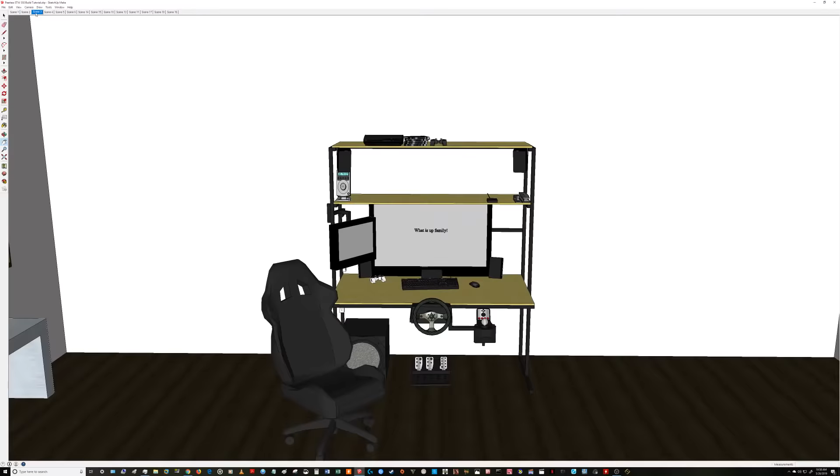Right now we're back in the lab, and a box build is on the menu. So what is this all about?

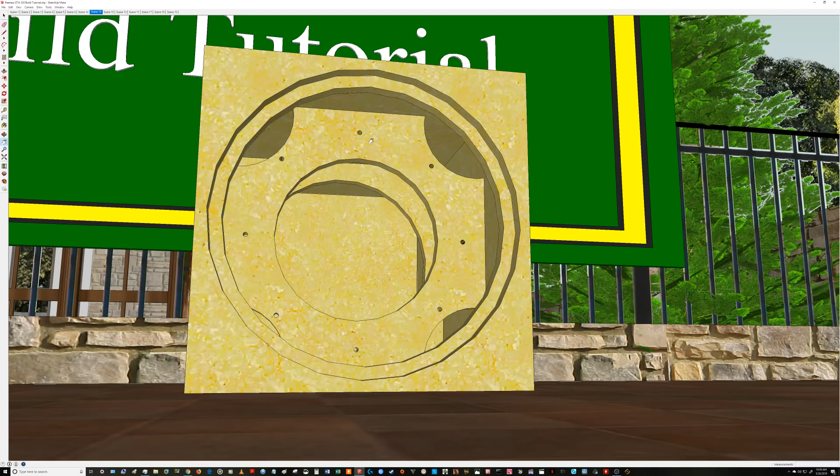In addition to this inner ring right here for rear mounting or rear bracing for the subwoofer, I have an additional piece right here for bracing for the center of the box itself. So this is pretty much what she's going to be looking like. This is what she's going to be housed in. And these are the cutout parameters that I used to construct the box itself. This box was actually cut from one piece of 8x4 MDF wood.

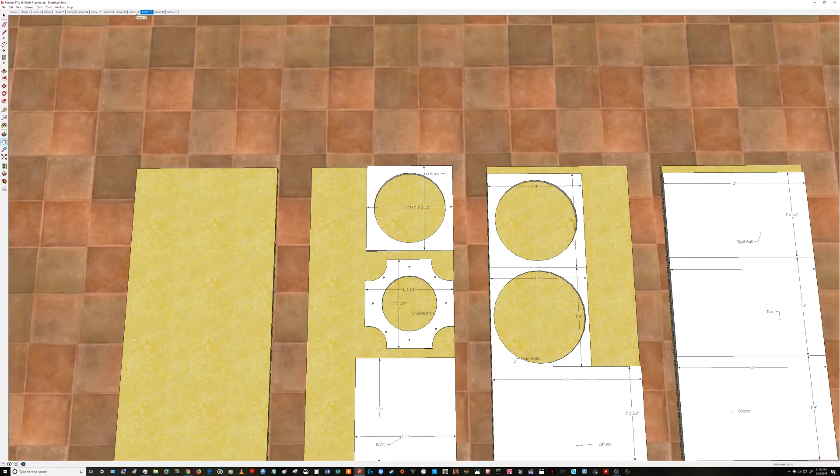But enough of that. Before we can even get to that point, there are a few things that we're going to have to point out about this build. Of course, you're going to need your overall outside diameter. This is what we're looking at right here. And over here on this side of the screen, you're actually going to have many parameters that you're going to have to take into account whenever building a subwoofer enclosure.

Now, Peerless have gone and had all these made available to us. Most subwoofer manufacturers do give you some type of parameters and cut sheet and specifications for their drivers. Peerless was one of those who went the extra mile and actually gave you some pretty good stuff as far as documentation. Right now we're over here at Parts Express, and as you guys can see, when you go here and look at this subwoofer, before you even purchase it, they have the documentation available for you right here.

All manuals and resources, these are clickable and downloadable. What I would suggest for you guys to do is open them in a new tab and get kind of familiar with them. Right here is the warranty. Of course, we won't be needing that unless you actually purchase it.

Then you have the driver specification sheet. This is very, very important because it does have some mechanical drawing right here, and it does give you some specs down here, a few TS parameters. You've got your frequency response. This is pretty good if you are looking just for an overview or a summary of what the driver is all about.

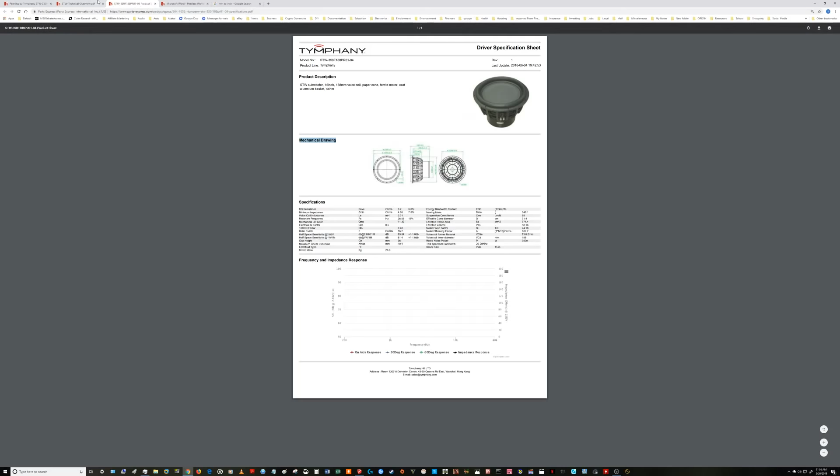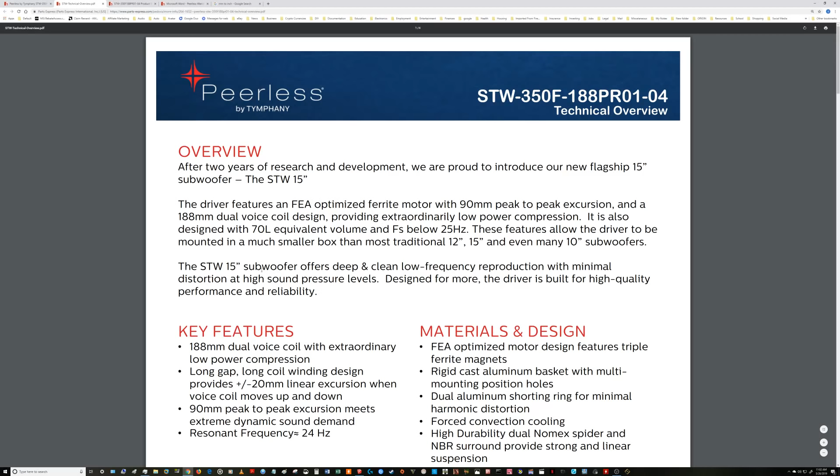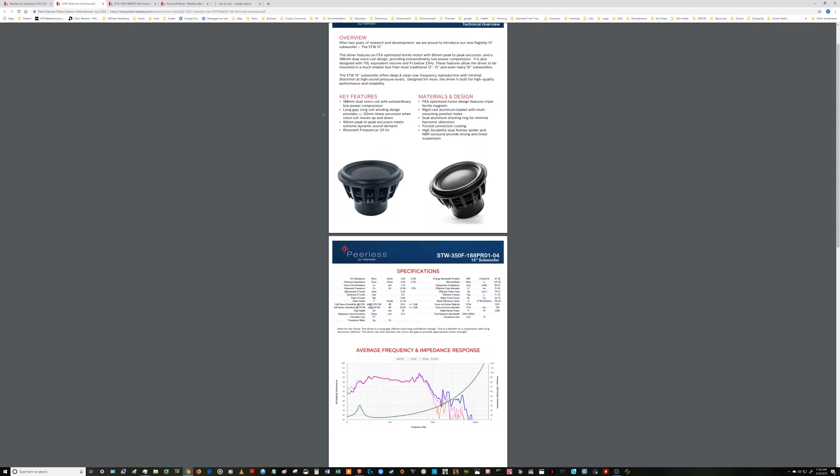But it is this sheet right here that I pretty much use myself. This is going to be the technical overview. This is the one I spent the most time with, because it gave more than just a summarized view or introduction of the driver. It gives a more specified overview, not an under-view or a summary. It gives an overview of the driver itself.

And as you guys can see, all this stuff we will take into account in another video when I actually go in and tune the enclosure. But since right now all I'm doing is a sealed enclosure, it's kind of easy because all I want to do right now is stick to the specification that the manufacturer had for it. Roughly 2 cubic feet is what they are recommending for a sealed enclosure, and sealed enclosures are very, very easy to do. All you have to do is make sure that the box is tightly sealed with no air leakage, and you're pretty much good to go.

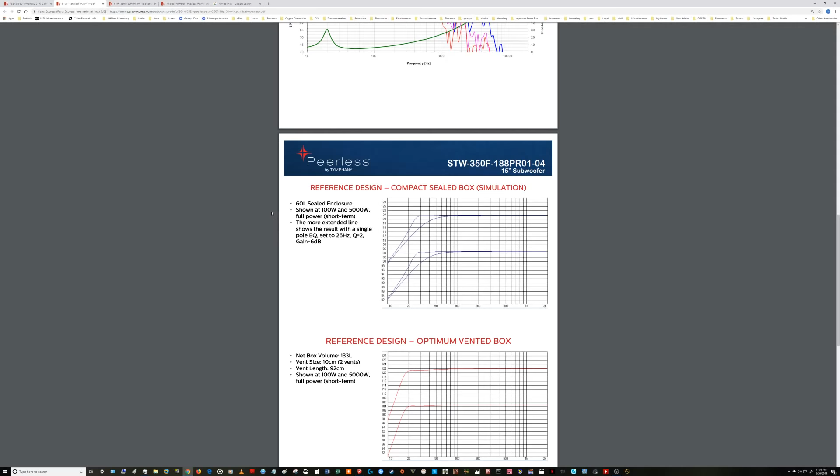It's the easiest type of enclosure to build. But when you're talking ported and band pass and things of that nature, then things can get a little bit more complicated. But for right now, we're going with sealed, and we're going to be using information off of this sheet right here in order to do that enclosure.

So this is what I want you guys to focus on the most. And for some of you guys who are not used to using millimeters in your measurements, don't be intimidated by that. Google—there are many calculators that you can Google. I mean, Google has one right here in the forefront.

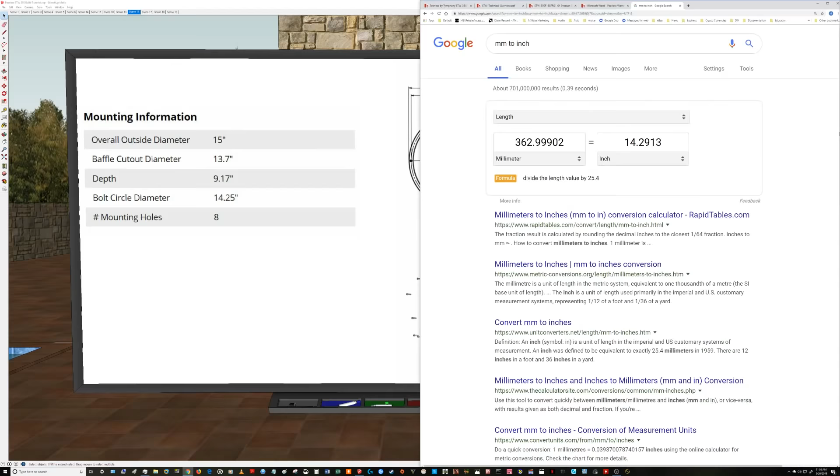All you have to do is search millimeter to inch on Google, and this little calculator will pop up. It's very convenient, and this is what we're going to be using to get some of those specifications we want over here in SketchUp.

We're going to be looking at some parameters that are in millimeters and converting them to inches. If you don't know how to do that in SketchUp, I'll show you exactly how. Right now this SketchUp environment is fine, but I want to show you how I personally build a box from scratch, meaning how I went from what you've seen earlier to this right here.

How do you go from a spec sheet to actually having something up to spec, getting this design on the floor with all your cutouts and precise measurements? In order to show you how I do that, I'm going to have to start anew.

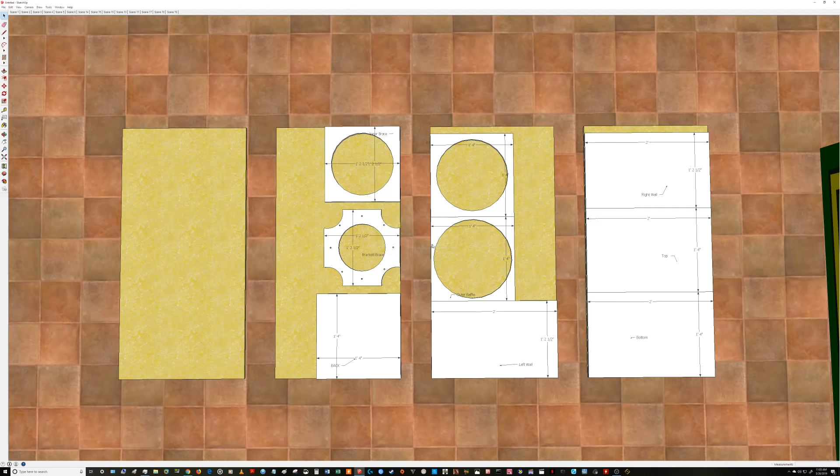So we're going to go to the file menu and click new, and I'm not going to save this since I didn't make any changes worth saving. Here you are - this is what a brand new SketchUp environment built from scratch looks like. I chose the SketchUp environment based upon inches and feet.

You can build an environment here in SketchUp based upon millimeters if you wanted to, but being that I'm used to inches - all my conversions and all the tools I use in my shop are in inches - that's what we're going to be using today.

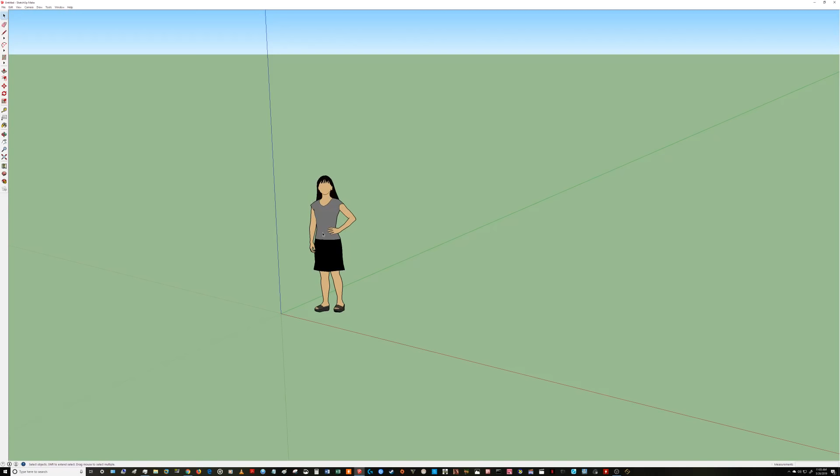My lovely assistant here isn't actually needed for what we're trying to do right now, so she has to go. Just know that anytime you start in SketchUp, you're going to start at the place of origin.

That's what these different axes represent - well, actually, these different axes actually represent those axes. But right now what we're focusing on is this center piece where they all connect, or where they all intersect. That's going to be your place of origin.

For right now, we want to focus on a piece of one of those diagrams I showed you earlier. If we go back to Parts Express and look at one of these cutouts, the one I'm looking for specifically is the one that shows the outer parameter. We need to find out exactly what this is right here.

The outer diameter, or the circumference of the subwoofer itself, is going to be very important to the next step we have to take in designing our enclosure. As you can see, this is 381 millimeters. We're going to go to our converter and put in 381 millimeters, and as you can see, that's 15 inches.

I'm going to show you right now why that's very important. If you go back here to all these drawings, the one I'm most interested in right now is the one in the center. This one is what I'm focused upon, because not only does it give me the outer diameter, it also gives me these other specs right here to play around with.

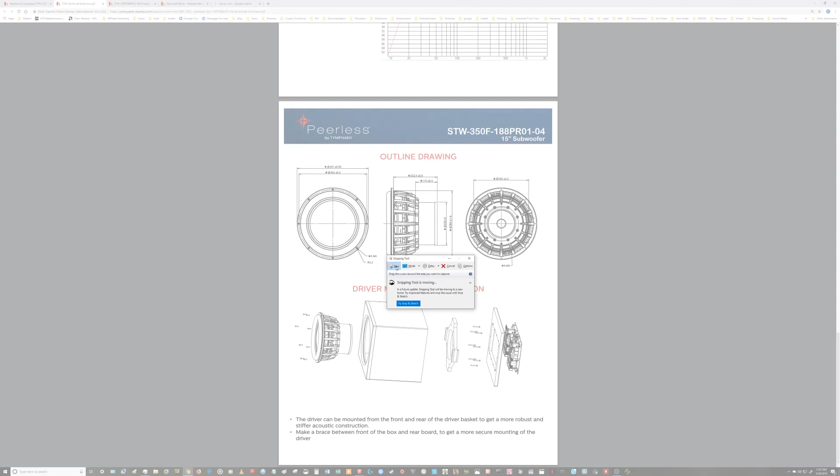So what I'm going to do is make a copy of this. If you don't know how to do that, Windows has a little tool called the Snipping Tool. You just hit new, and by default it allows you to do this, and you can actually save it - save it right here, and build upon this image with these little parameters already applied. I've already taken the liberty to do that, so I'm not going to save it again.

Right now we're going to go back over to SketchUp, go to the file menu, and hit import. So what are we importing? We're going to import that exact image we talked about earlier - remember, I told you I had already saved it.

So we're going to be importing this little image right here, and we're going to actually use it as an image, not as a texture. A texture and an image is different.

An image is just that, it's an image. A texture is something that you apply to objects that you create within SketchUp. Because when you first create any object within SketchUp, it's just a plain white object, regardless if it's a circle, a square, a sphere, a cube, or whatever. It's going to have a plain white finish to it.

And if you want to add texture like wood or grass or stone, you would have to add a texture to it, and it will cover that entire object. In this instance, we don't want to use a texture. We want to import this as an image, and I'll show you why in just a second.

So we're going to select this guy right here, and select open. Now what we're going to be doing right now, you don't have to do anything. You move your mouse around, and this is attached to your mouse. What you want to do is go here, hover next to origin, and SketchUp has a snap feature or snap function that automatically snaps when you get close to certain edges, angles, centers, things of that nature.

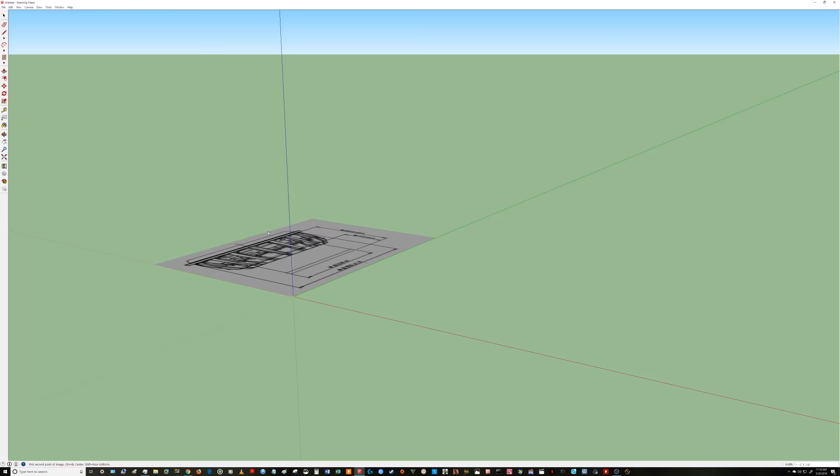You're going to find all that stuff out once you start to use SketchUp more consistently. But for right now, it's snapping itself to the green axis, to the red axis. You see the mouse is going slightly past it, and it's still connected to it. That's the snap feature. We're going to snap it to origin. Once you click, it gives you the ability to drag it wherever you want it. You see that? You can go in this environment, that environment, whatever axis you want.

This is green and red. This is green and red. I guess they will all be green and red. Anything but blue. You can't do the blue because the blue, of course, is your north-south pole. But anyway, what we're going to be doing—I shouldn't say north-south pole, it's actually your y-axis. And the green and red would constitute for an x-axis in this case. I don't know if this is a z-axis or not. My geometry isn't that perfect.

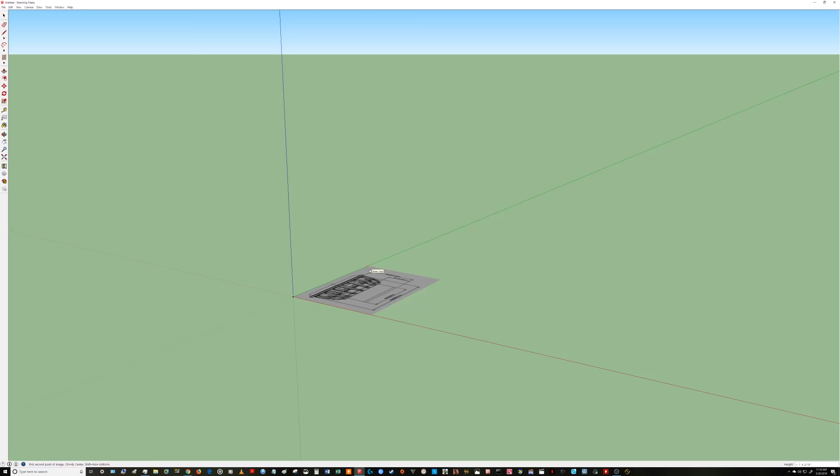But anyway, we're going to snap this to the red and green axis on this side of the environment. And we're just going to click it again. And now it's there. So why did I say that was so important?

Okay, so if we were to use our tape measure right now, which all you have to do is a shortcut—you can either come over here, and for most people, when you first start your SketchUp environment, this menu may be running along the top edge of your SketchUp environment. I snap mine to the left because that's what I'm accustomed to. But if you want to measure and see what the actual size of this is, you're going to get your tape measure. Start from one—it doesn't matter what edge you go from. Click and drag. You see this? Snap it here, and it tells you that's 1 foot 3 7/8 inches.

Okay, so that's roughly 15 inches. 15 7/8 inches is what you got. 15 7/8 of an inch. All right, so that's way too big. That's not what we're looking for.

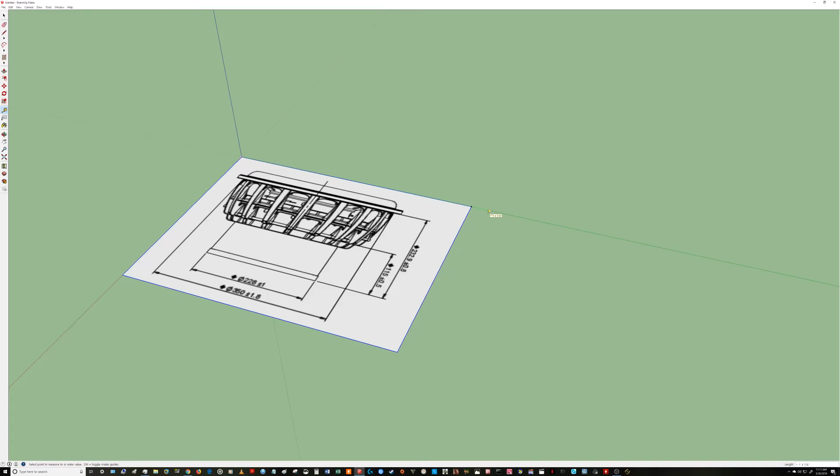We know that we pulled this drawing directly from the manufacturer. We know that these parameters, as they seem fit, are correct. We do know that this is up to scale. In this environment right now, it is not up to scale, but the way that it was constructed on this piece of paper here, it is up to scale.

So what we need to do—and to release this, just hit the escape button and it lets it go—is to remeasure this and reshape our environment to these specs, to what's on the paper. Now we do know that this outer diameter, or the circumference of the driver itself, is 15 inches.

Okay, we know that. So what we're going to be doing here is get as close to this edge as we can, which is about here. Click, get a handle on it, to here. You see how it snaps to the green automatically? I love the snap features in SketchUp. It's almost like you can't go wrong—there's no way you can't do a straight line. But anyway, go to the other edge here, and as you guys can see, that thing says 11 inches, 11 3/16 of an inch. That's too small.

This needs to be 15. You're going to click, right, as if you've just measured that. As you can see in the lower right-hand corner, it gives you that measurement. This box is waiting for your input. Everything right now is in inches, so all you have to do is specify the size you want that last measurement to be. Just type 15. You don't have to click in that box, just type 15 and don't do anything else.

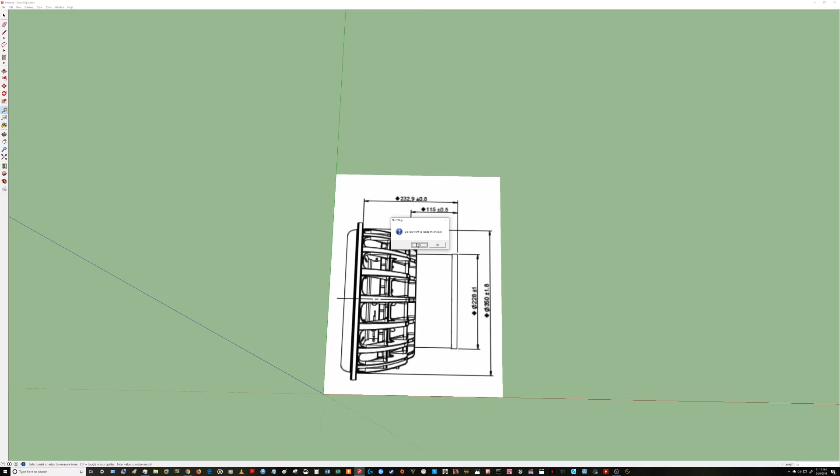Once you measure and it shows you what it is, you tell it what you want it to be and hit enter. This dialog box pops up and asks if you want to resize the model. I'm going to say yes, because I want the whole model to be based on the measurements of this diagram I pulled from the manufacturer. The manufacturer built this to spec, and that's what we're going to build our box around. So we hit yes, and it resizes. Now from here to here should be about 15 inches, and that's what you got, 15 inches.

So why is this very important? We know we're looking for a 2 cubic foot enclosure, because that's what the manufacturer recommended, and that's what we want to shoot for. In most cases, that's what you guys would want to shoot for. But in my case it's a little different, because the 2 cubic feet gives you an F3 of 43 hertz.

I want mine to be tuned a little lower than that. So instead of a 2 cubic foot enclosure, I want to get this thing as big as I can - well, I shouldn't say as big as I can. I want to give it at least 3.5 cubic feet, and I'll tell you why. I ultimately want it to be around 3 cubic foot, but I'm saying 3.5 cubic feet to account for the displacement of this massive motor, and also bracing on the inside. So if I make this 3.5 cubic feet, that accounts for the 0.3 cubic feet this thing already takes up in displacement, and the 0.2 cubic feet of bracing I'm adding later. That gives me roughly a 3 cubic foot driver with an F3 of around 33 hertz. That's what I'm looking for.

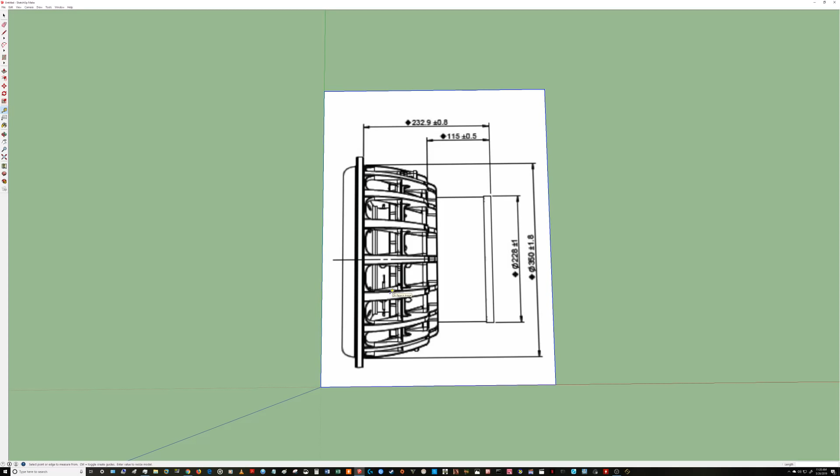In my mind I already know what I'm going to be making and how long. It's going to be 2 feet long, and 16 inches in width and height, and 24 inches long. I've done the measurements, that's what I'm going for. This thing is also going to be double baffled, and rear mounted right here, so it has to have another rear mount brace on the inside of the box. We have to do all of that stuff. That's my mental plan. Now to move on with the actual measurements.

Okay, so right now what we have here is depth. We're going to have to deal with getting these things converted. That'll be the next step, to get these things converted. Let's get this converter back up. We're going to go to tools, and go to text. This is what you want. So right here you've got 232.9 millimeters. We need to find out what that is.

Like I said, there is a millimeter environment for all you guys who do things in millimeters that you can choose when you first start up SketchUp. Let me just open up a new SketchUp to show you guys exactly what I'm talking about. When you first open it up, if you go to template, you see this? I'm doing feet and inches, but you can do meters, you can do an architectural design. Let me scroll and let you guys see it. And there it is, millimeters. You can do this as well. So you can do a whole lot with SketchUp.

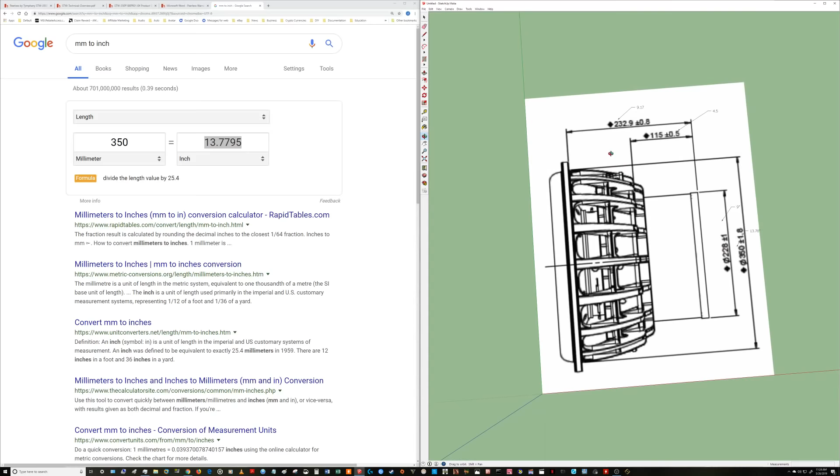All right, so where do we go from here? We have the driver. We know that we don't want to make this thing massive, right? So what we're going to do, in my case, I know I'm going to be using 3/4 inch MDF. So what I'm going to be doing is constructing my base from this right here. I'm not going to do the base yet—what I'm going to be doing is the face of it, and I'll show you how I do that.

Now, you guys can pick this—this is rectangle, but I'm so used to it, I just use the shortcuts. Select R. If you select R, it turns into the little rectangle symbol, as you guys can see here. I think if you hover over it, it may tell you. And they do more than that—they do circles and polygons as well. R and C are the shortcuts, okay?

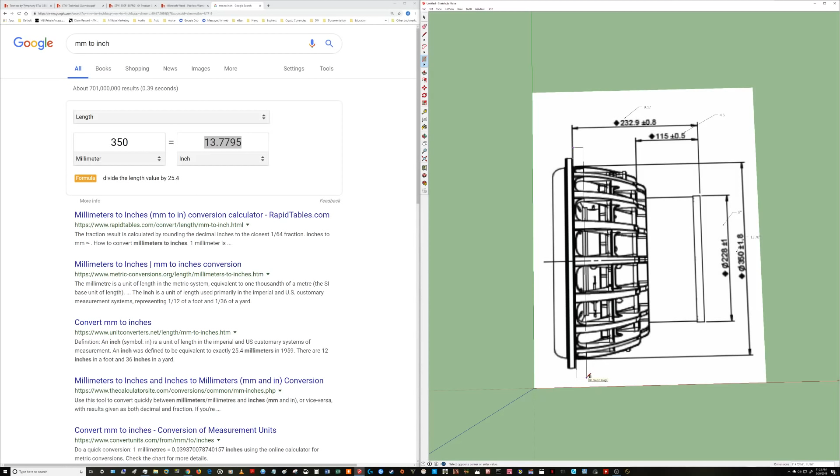So what we're going to be doing is, this is 15 inches, so we want the whole face to be about 16 inches, okay? So we're going to go half an inch out on the outer side of it. So this is going to be 16 inches overall. We want it to be 3/4 of an inch wide, because that's the MDF we're using, and 16 inches long. Okay, so there we go.

Now, this is not perfect. As you guys can see down here, this says 16 and 5/8 inch. We don't want that—it says 5/8 of an inch wide. This is your length and width in this instance. Depending on what axis you choose in the beginning, this can change. But for right now it says 16 and 5/8. We don't want that. What we want... and like I said, this thing is ready.

Every time you make a measurement or create a shape, this thing is waiting for your input. We want 16 inches, right? Separated with a comma. And we're going to say, you can do 0.75 of an inch, or you can do 3/4.

In this case, I'm going to do 0.75 of an inch to show you guys that it does work, okay? You can use your move tool, shortcut M. If you see this here got highlighted, it's crosshairs, and you can move this a little bit closer. A little bit closer. And as you guys can see, there's more room on this side of the driver than it is on this side of the driver. So what we're going to be doing about that is we're going to be adjusting this some.

So how do you get that perfect 1/2 inch on either side? I cheat a little bit. I use the line tool, which is the pencil, shortcut L, right? All right, I use the line tool, and what I do, I come here. That's not on the edge. I come here on the edge, and I go this, and I just say 0.5, which is 1/2 inch.

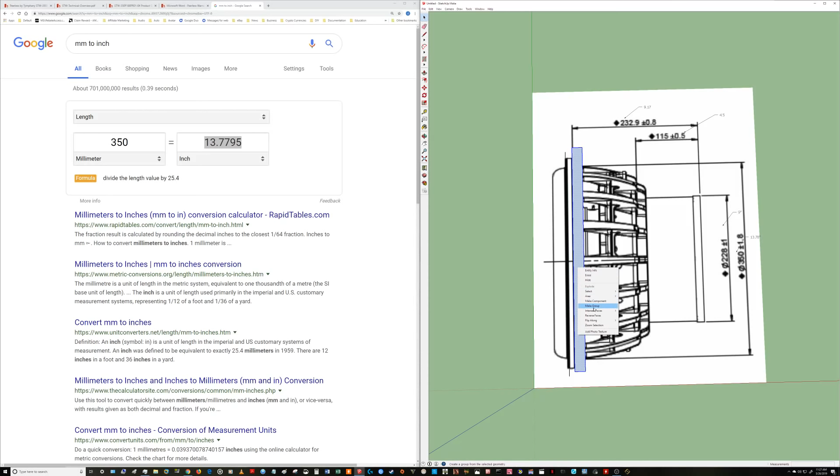Ooh, I forgot a very, very important piece of this. Whenever you're making plain shapes like this, like we made, you need to group this shape, okay? Double click it, it selects that whole piece. It did not select the picture. It selected this whole piece. And what you want to do is right click and say make group. And what it's going to do is group all of these individual pieces.

The way you have to know about SketchUp—if we just get another rectangle going, we're just going to make a small piece. The way that SketchUp works is that it does not look at this shape as being one shape until you tell it to look at it as being one shape. Right now, the way SketchUp sees this right here is that it has a center, it has a fill. Okay, it is filled here, which you can add textures, colors, whatever, and it has 4 individual edges. And that's how it would look at this shape right here. It's not really even an entity upon itself.

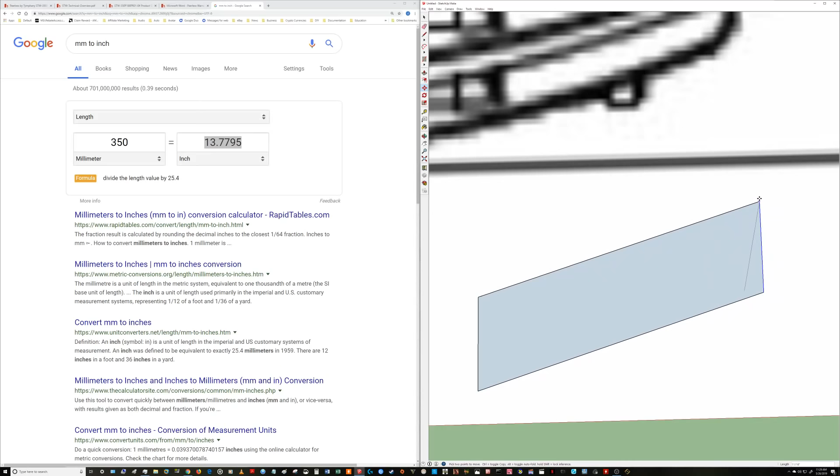It is consisted of 5 different entities. You have the center, which is the fill, and 4 individual edges. You can manipulate these edges. If you take this corner here and pull it, it will pull this thing in all types of directions, which in some cases is really good if you're trying to get a unique shape. But in this case, what we're trying to get is crisp, sharp edges. Okay, we're working with wood here.

All right, so what we're going to do, we're going to get rid of that. We already have grouped this guy, and once you group it, guess what it does? It moves as one piece. That's what you want, and it's actually snapping back to that place. That is so amazing. And that's just a picture, but it's snapping to the place where you originally made it from. That is so amazing. But anyway, enough of me doing that.

What you want to do here is line it up here. And as you guys can see, it automatically lined up here for you as well. So now it's perfectly lined up like you would want it, okay? Perfectly lined up for you.

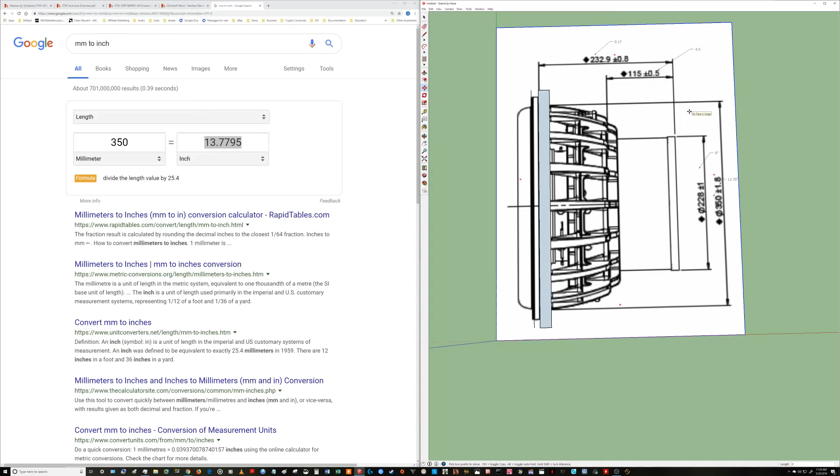All right, so what do we do next? Right now, that is just a 2D shape, right? It has no height. It has no anything. It's just a 2D flat shape. What you want to do is give that—you want this to be a 3-dimensional shape.

So what you want to do is use your push and pull tool, which is this little arrow with a box. You grab—okay, so before you do this, you know what? I'm going to ungroup this for you guys. I'm going to explode it. This is how you ungroup in SketchUp. As you guys can see, it goes back to being 4 individual corners and a fill. So what you want to do—because I got ahead of myself, it's been so long since I had to explain this to someone, I'm sorry.

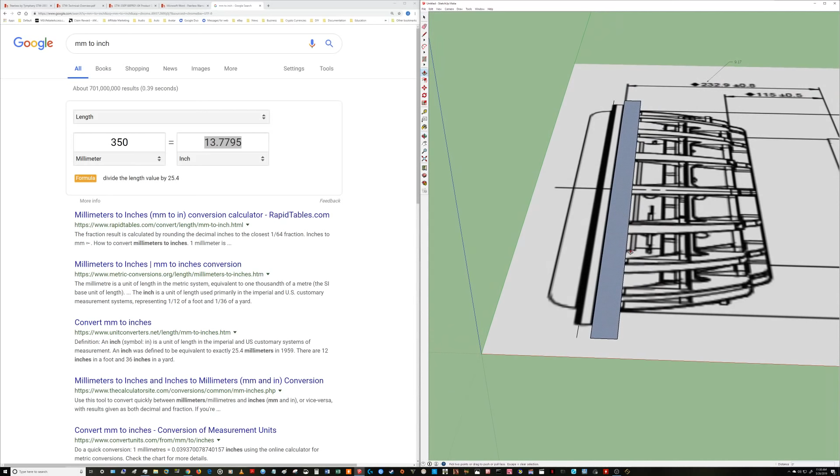But what you want to do is use your push and pull tool before you even group. And just pull this up. Now it's starting to look more like what you would be working with in a shop, okay? That's kind of what you would be working with in a shop, right?

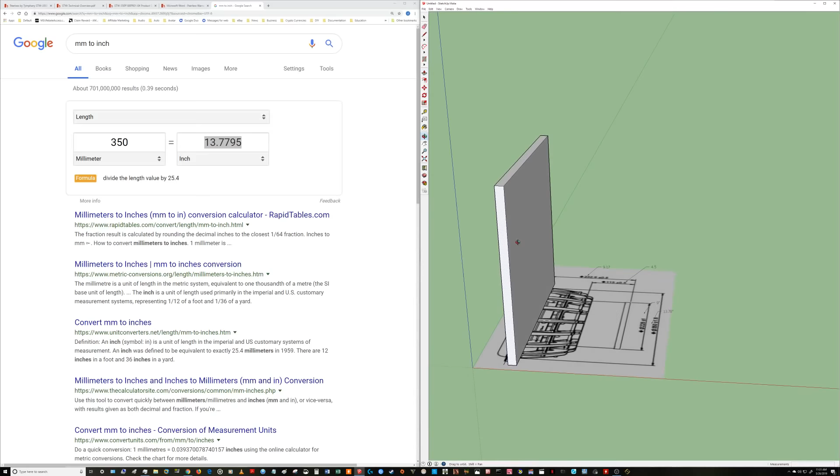So I'm going to undo and show you guys that one more time. You can pull this up. And how high did we say we wanted this? We wanted it 16 by 16 and 24 inches long. So, of course, we're going to type in 16. That's how tall it would be. Now the box is looking more like a box.

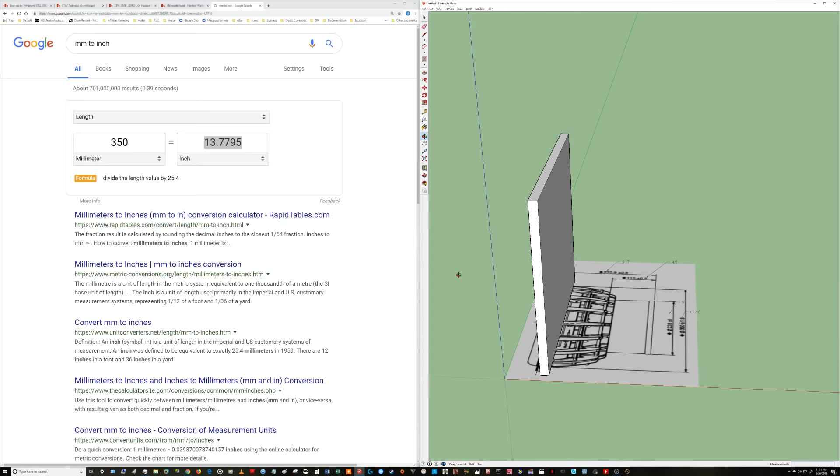And to make sure that our measurements are correct, we click T, the shortcut for tape, and we measure it. 16 inches, 16 inches, 3/4 of an inch. Just like the piece of wood you would cut. All right, moving on. Hit escape to release that.

Now, this is another cool feature right here. Oh yeah, don't forget to group this. If you hit the space bar, it gives you back your select tool. As you guys can see, this is not one group. These are still individual groups. Even more individual groups now, because the edge is also individual.

So what you want to do is double click this again. We'll actually triple click this. 1, 2, 3. It selects the whole thing. Remember the first time a double click would do because it was 2-dimensional. But now that it's 3-dimensional, you need 3 clicks. And what you want to do again, right click, make group. And there you go, you have the group.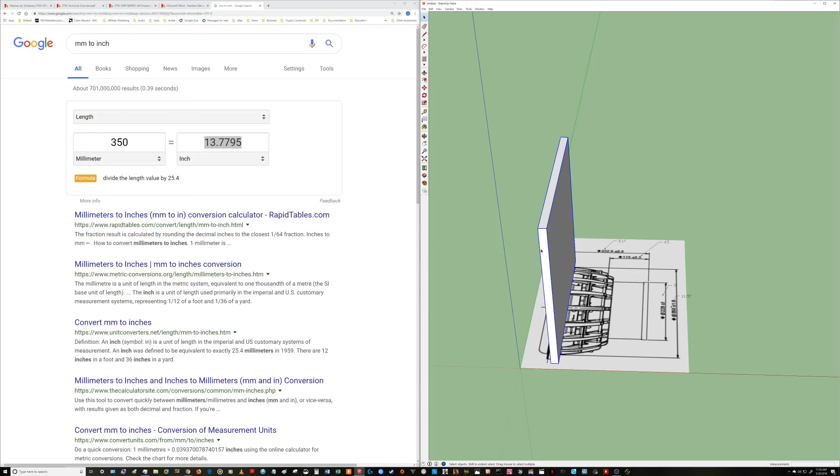All right, so another thing, we know that the front and the back are going to be the exact same, right? But I'm not going to jump ahead of myself. All right, so what do you want to do from here? What you want to do from here is you actually want to find your center, but we're going to get to that later. I'm not going to jump too far ahead. Let me get rid of that.

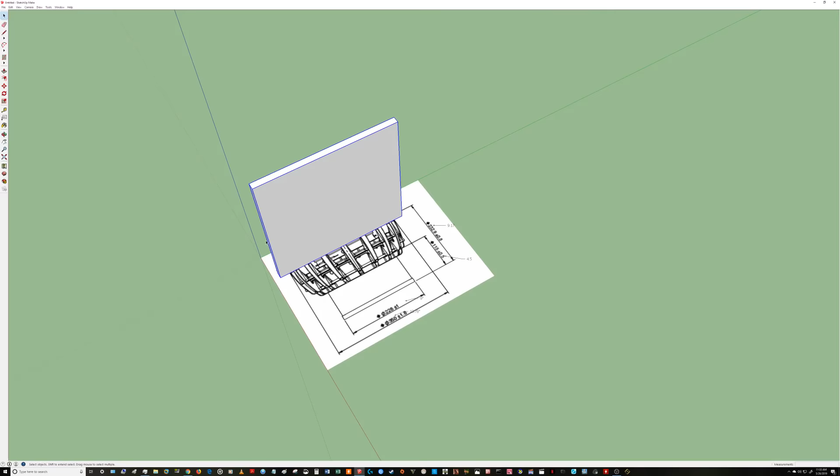All right, so what you want to do now is make your sides. You can make your sides. And don't forget this is going to be double baffle. You know what? Let's do the baffle first. That'll be fun. Let's do the baffle first.

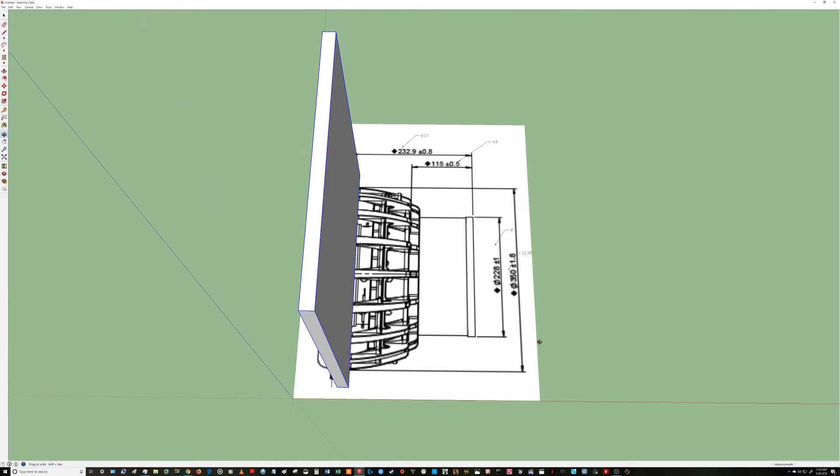As we can see, we know that the outer diameter of the woofer is going to be 15 inches. The inner diameter is what we want to talk about now. The inner diameter is actually this number right here, 3.78. 13.78 inches is going to be our inner diameter. This is where we're actually going to mount the woofer into that hole, and you're going to be able to drill your holes from there. And that's what we're going to be doing next, the inner baffle. Outer baffle, 15 inches. Inner baffle, 13.78 inches.

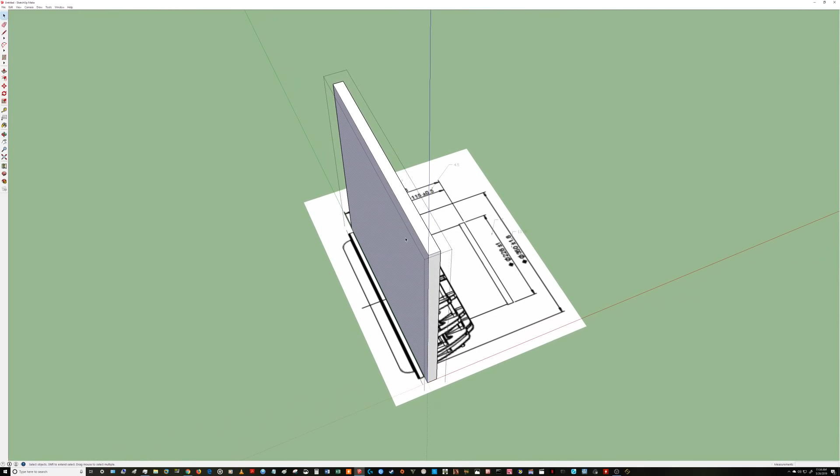So how do you do that? What you want to do now, since this thing is a group, it is one solid piece. You want to double click. Now you get on the inside. You open that group up, which is illustrated by the dotted lines here. It lets you know now you're on the inside of this group and you can manipulate the individual pieces or components of it. You want to manipulate the face of it.

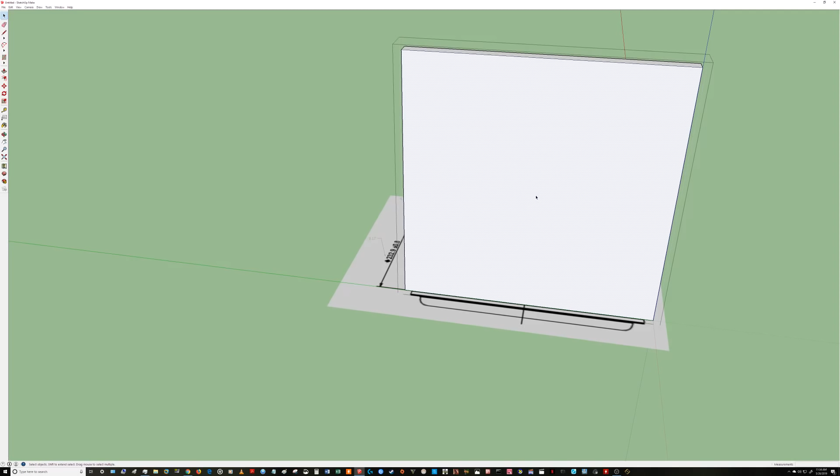What you want to do now is find the center of this piece. Why do you want to find the center of this piece? Because we need to find a center in order to cut a perfect circle. Keep in mind that what we're trying to do now is illustrate what it would be like to use a Jasper jig, the perfect circle cutting jig that everyone uses. That's what we're kind of trying to constitute now.

And the best way to do that is to use the line tool, shortcut L, and go from corner to corner. This is how you would do it in the shop, and this is how we're going to do it in the environment. Boom, just like that, and this would be your center. So what would you do with this center? You would take your circle, remember that's shortcut C for circle. And what you want to do is take half, because we're going to use the radius. The circle is measured in radius in order to get a full diameter.

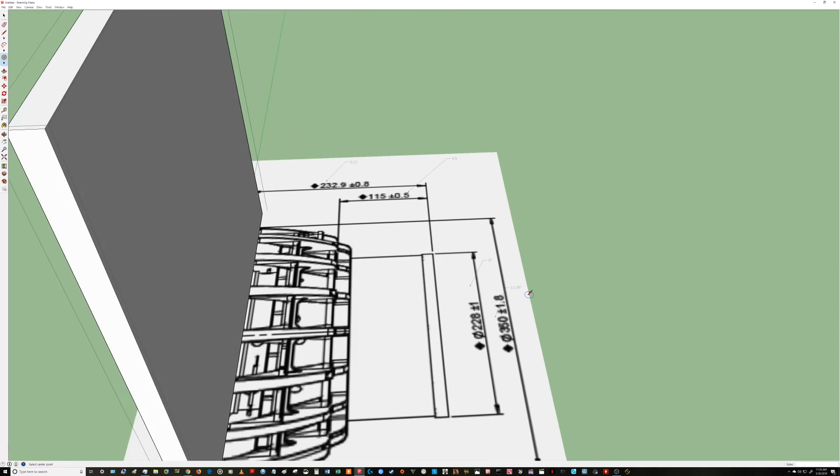You have to type in down here the radius of the circle, and it will do the diameter for you. So we know that the diameter is 13.78 inches. We need to pull up a calculator. 13.78, divide that by 2, and that'll give you the radius. 6.89 is what we're looking for.

So we come here and drag this. Doesn't matter how big you make it at first, as long as immediately after you type in 6.89 and hit enter. That's your 13.78 inch circle.

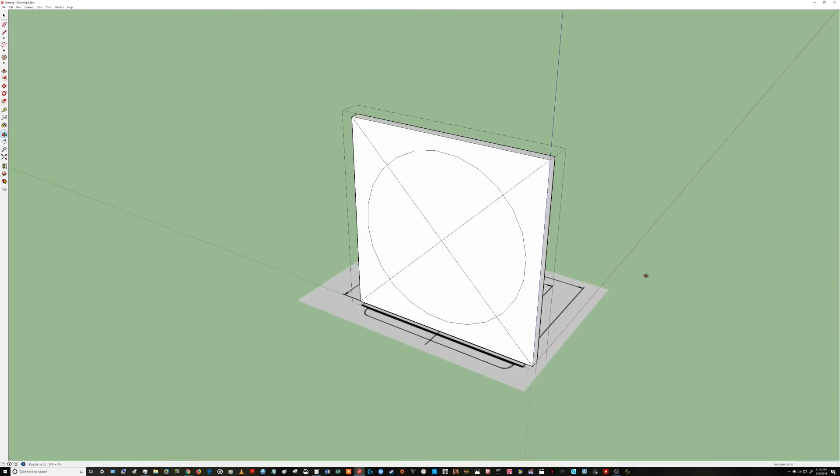And to get rid of these lines right here, you want to erase those lines. Use shortcut E for erase. You can hold it down and swipe, or click them individually. Click them individually - that's how you'd do that.

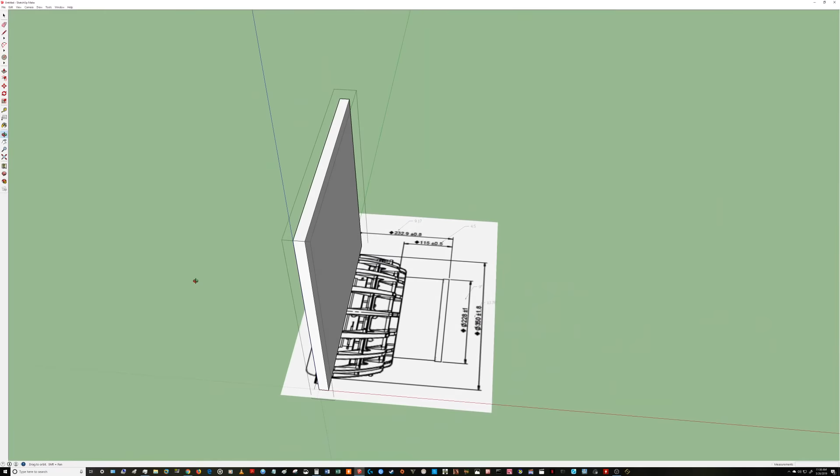Now we have the making of a circle. So how do we get an actual circle into here? What you want to do is use your push tool. Your push tool is amazing, it can do a lot of stuff, and you guys can already use your imagination - like this would be what you'd use for ports and things of that nature.

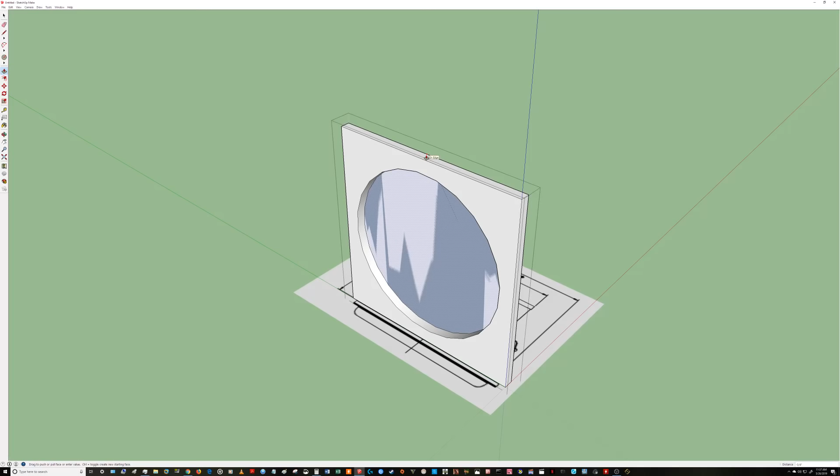But for right now, we want this hole. We want a hole here, not a tunnel or a port. So how would you make a hole? Well, just push this to the outer perimeter. You see that? You see how it looks different now once I do that? Because you constrained it upon itself, and it disappears once you let it go. That's how you get a hole in SketchUp.

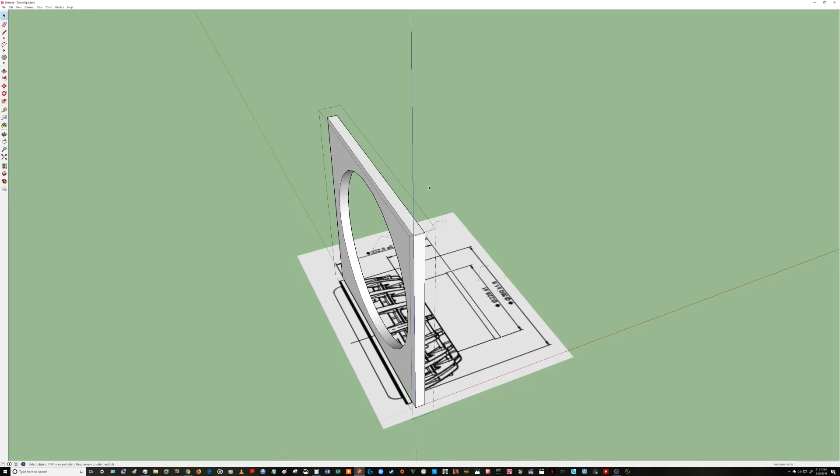All right, so we're still on the internals of this group. We're finished with this group for right now, so what we're going to do is close this group, okay? We don't need it anymore. So let's close this group by clicking the space bar one time. Oh yeah, escape - I'm sorry, because you want to escape the group.

So anyway, yeah - you know what I forgot? I actually forgot to do the outer baffle. This is the inner baffle, this is what the speaker is actually going to rest on. But our outer baffle has to be 15 inches, which we already know. That's pretty easy math - 15, half of 15 is 7.5. So what we're going to do is create another one of these, and we're going to make...

You know what, let's back up a bit - let's cheat a little bit, right? Hit Control Z and that'll back you up, or you can go up here to the edit menu and hit undo. But we're not going to be doing all that, we're just going to hit Control Z. And what we want is this again.

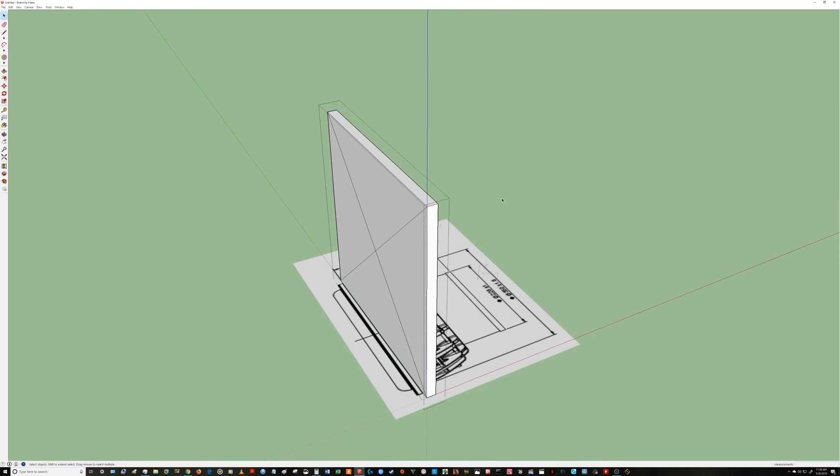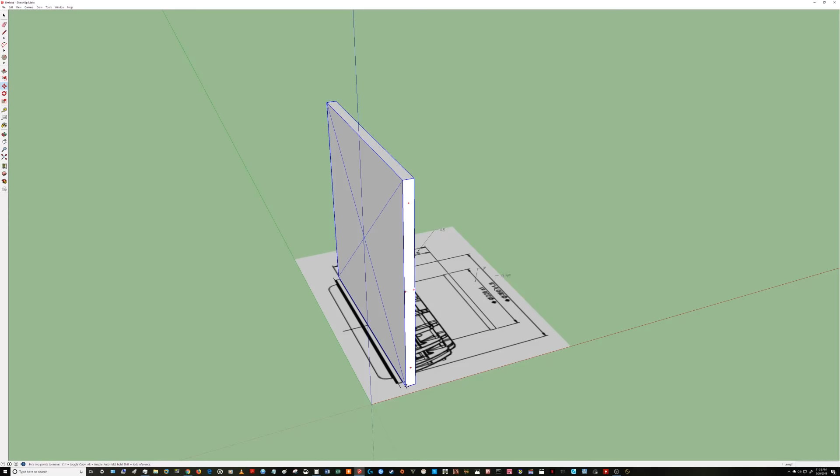I'm going to show you guys another pretty cool tip of SketchUp. So we escape that, right? So what we want to do now that we have this - why do the work twice, right? We're smart, we don't work hard, we work smart. So this is the thing: use your move tool, that's shortcut M, and push this guy backwards, drag him along the red axis.

You're still holding down your mouse, you can put him anywhere. While still holding down your mouse, click the Control key and it makes a copy for you. You can let it go. Now you have two of them.

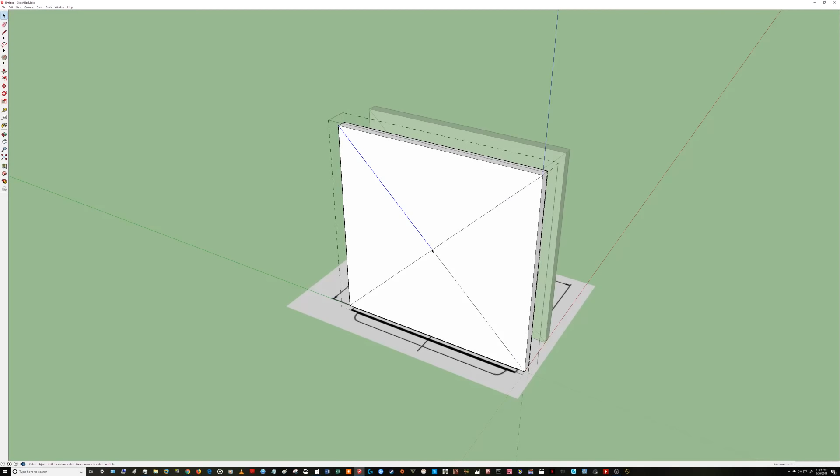Now you can come here, right? Let's go back into this group. Now you can come here, find your center with the center, do this - 7.5, that's half of 15, gives you a 15-inch diameter, right? Use your erase tool again - right, we've done this before, I can speed through this piece.

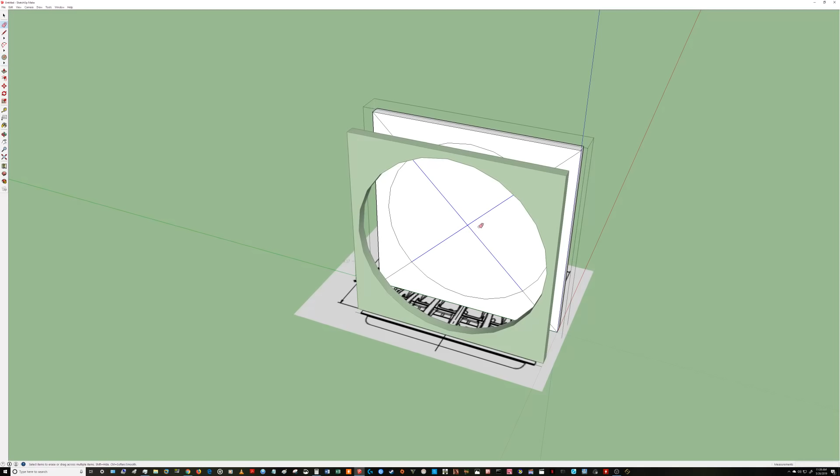And boom, escape that - let's escape this guy again, or you can just click outside of it and it'll do the same thing. And let's do this guy, right? We know what we're going for here. And what was that measurement again? 6.89. All right, so we're going for 6.89. Boom, there we go. And we're going to use this again - we're doing pretty much the same stuff we've already done.

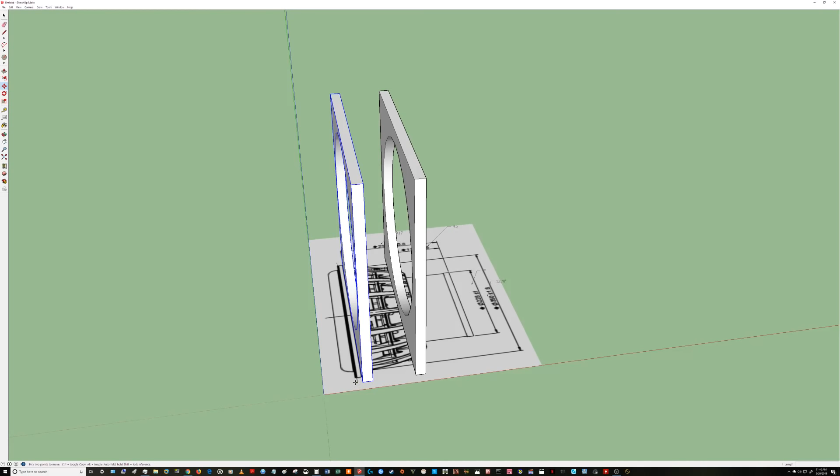And push tool, all right. So let's hit space bar to get your select tool back, click away, and there you go. All right, so we already know we're going to have to move this up some because that's not where it goes - it's actually going to go right here in front of this line. So we're going to grab it here, place it here.

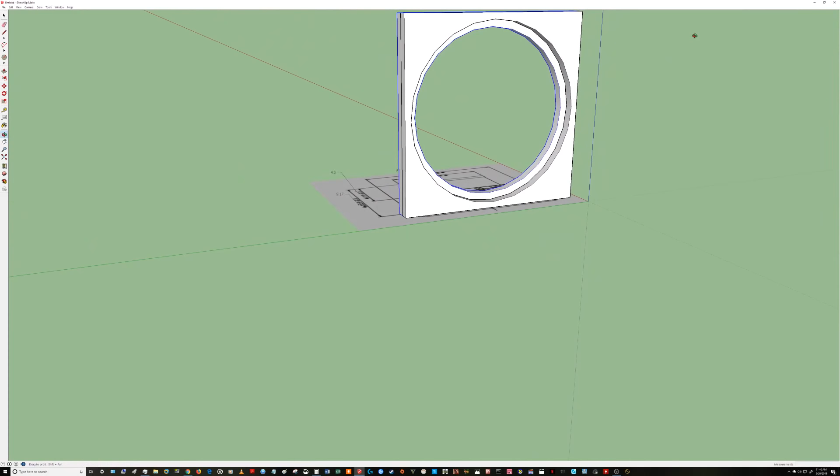Now we're going to grab the front of it and push it up to the back, like that. And that's how it would look in a real world application. You see that? This is how much of your surround is going to be, because this is up to spec. Remember, that drawing is up to spec, and this is exactly how much of the surround is going to be visible and protruding when you do your enclosure. Keep that in mind. So if you don't want this, if you want your surround to be flush mount, looks like you're going to have to add another piece of MDF.

I don't mind my surround not being flush mount, so I'm not going to worry about it at this point. Okay, we're going to continue onward.

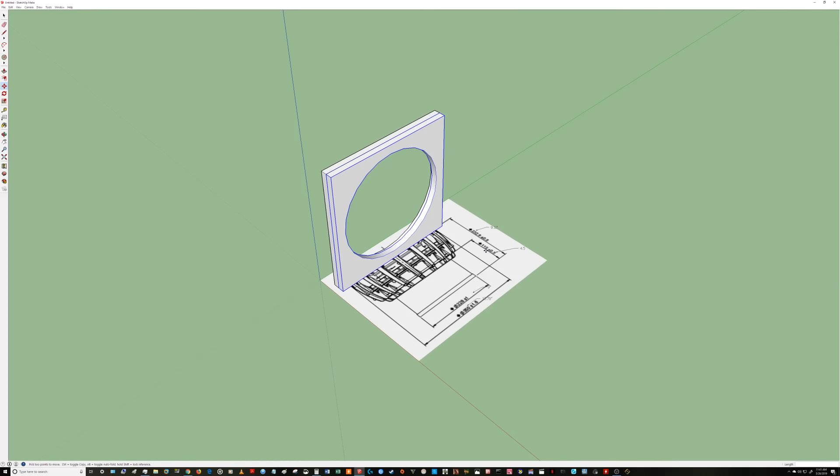Now we do know that we're going to be using another piece of 3/4 inch MDF, so might as well get that going. Use the rectangular tool again, come down here.

And it is 16 inches, but it's got an extra inch in there, that's too much. So what you do is come down here, the 16 is fine, anything after this comma is not fine. So I'm just going to click the comma, we want to leave the first part alone. Anything after the comma is wrong.

In this case we're going to put 3/4. Last time I put 0.75 — I'm going to show you guys that fractions actually work as well. And there we go, it corrected itself.

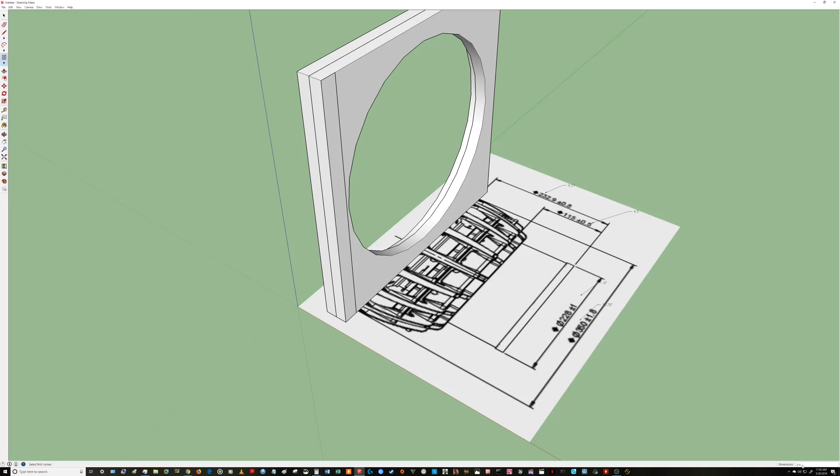So what we're going to be doing here is pulling this to 24 inches. Don't worry if you don't get it right here, we're looking at this — you see that? We're going to be pulling, and we're going to correct that too. 24, enter. You guys kind of see where I'm going with this.

And remember, you want to group this — 3 clicks, make group. We're going to move it over here, and copy it over here. Remember how to copy? Grab, drag, hold your key down, hit control, and there's your second wall right there. You just snap it to the outer edge right here so it's a perfect fit. Perfect fit, that's what you want.

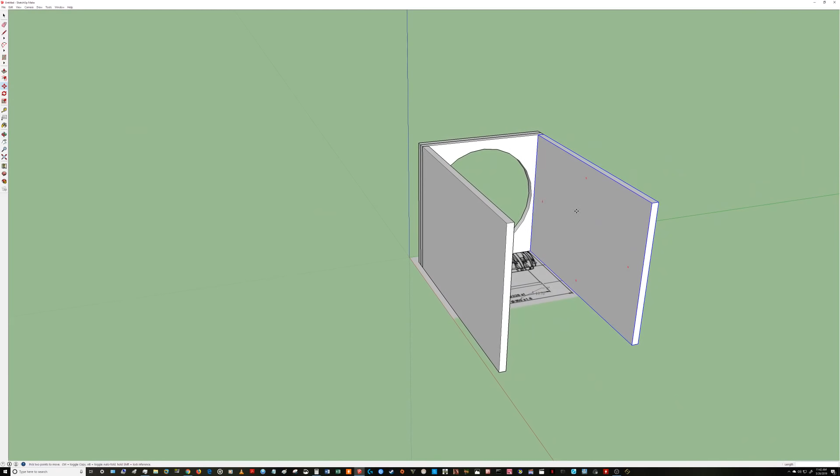And you already know that this back piece is going to be — 16 inches, I keep saying diameter — it's going to be 16 by 16 by 16. An easy way to do that, and also keep in mind that it's going to be on the outer edges of it. So keep that in mind, both of these are grouped, so we're good for that.

And I'm going to show you what'll happen if you don't group pieces and try to put them together — they'll actually stick together as one, and it'll be hell trying to move the pieces individually. I'm not going to show you that, you guys get the gist of it.

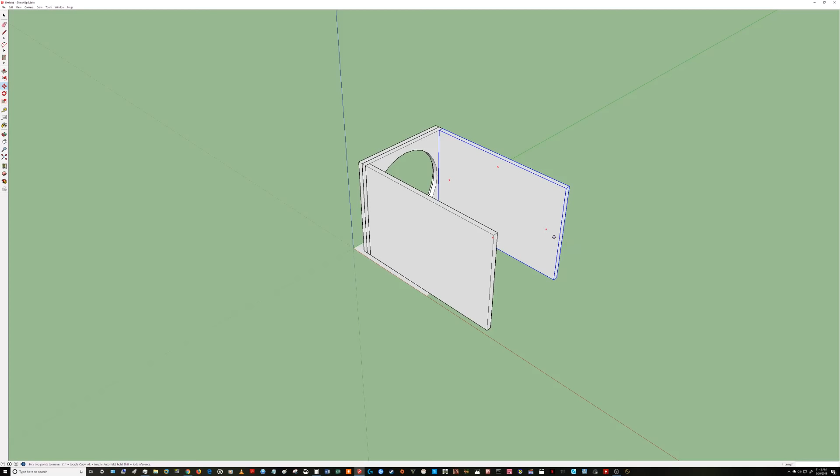So let's make another rectangle from here to here. You see that? And what we're going to be doing is pulling this out — this needs to be pulled out 0.75. And we're going to group: 1, 2, 3, make group. And now we can actually take this guy and move him however we want to move him as well.

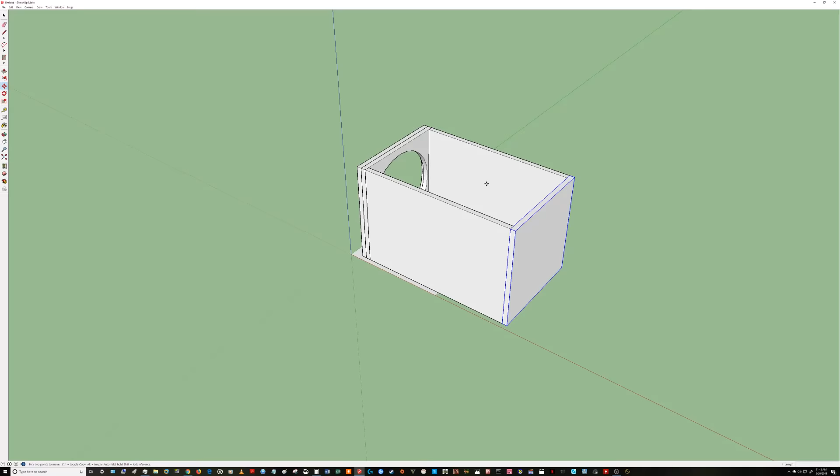All right, so there you go guys. All you got to do now is add a top and bottom, and you got an enclosure. It's just that simple. And the same thing goes when you're trying to do the brace pieces as well.

So when you're doing the brace pieces, how would you do that? We already know that this right here is going to have to mount to the rear of this. So how do we go about finding the mounting points? We know that the internal bracing of this is going to have to be 14.5 inches, because we got to take 1.5 inches off to constitute for the widths of the sides, which are 3/4 inch over here, 3/4 inch over here. To fit in the middle, you have to deduct that from 16, so that'll give you 14.5 on the inside. I can prove that to you guys right here.

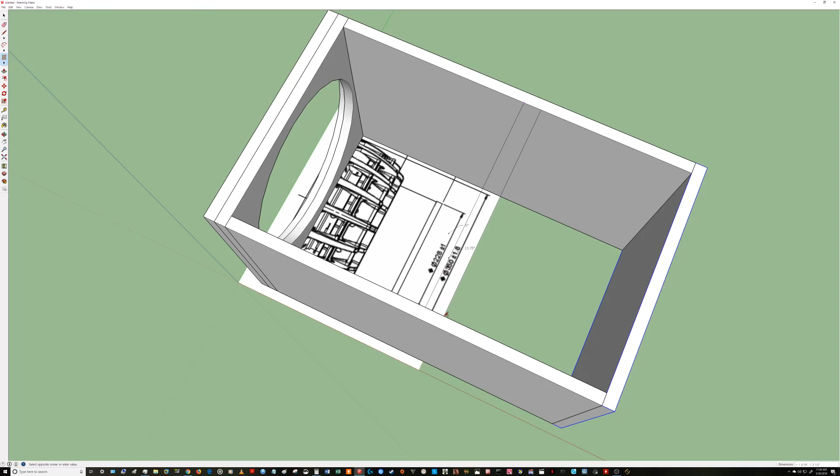Okay, we want that to be 0.75. Ah, I did it wrong, let's go back. Where are you?

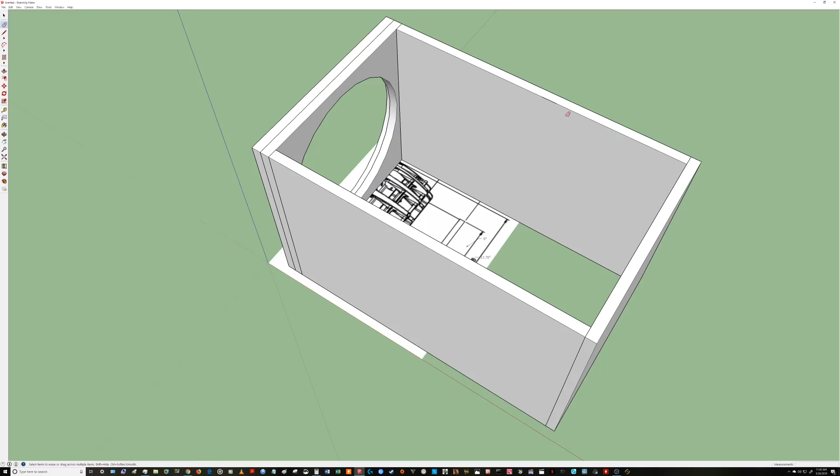So we don't want that. Let's delete that, get the erase tool. And there we go - oh, way too much, way too much. All right, a little line was still there.

So what we want to do is use the rectangle tool again. We want to come down, because this thing actually mounts to these brackets right here at the back. So we're going to take it from about right here.

As you guys can see down at the bottom, we want 3/4 inch, and we're going to bring it all the way across. And we know that second number needs to be 14.5 inches, and it'll fill itself in.

Let's use that push tool again, and we're going to flush it with this. All you gotta do is you can try to drag it, or you can type the numbers in, but another shortcut is just find an edge.

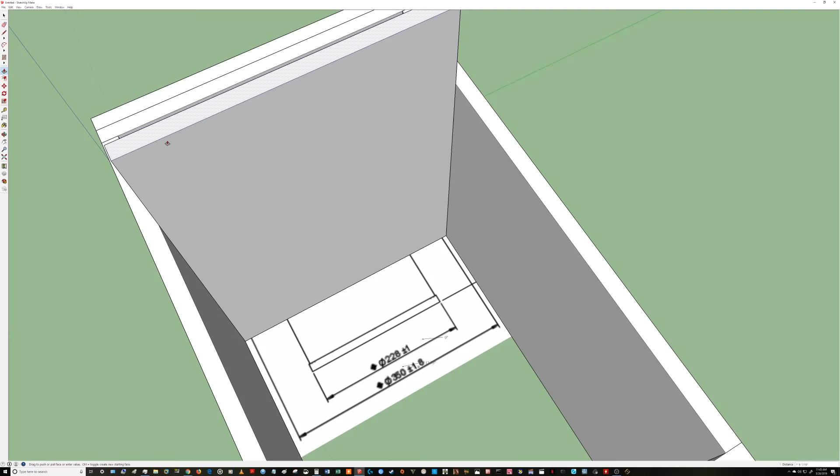It's going to be flush with this edge, and it's not going to go any further than this if you select that edge. So now you've got to group this as well.

3 clicks, make group, and now you've got your baffle in which that thing would connect to.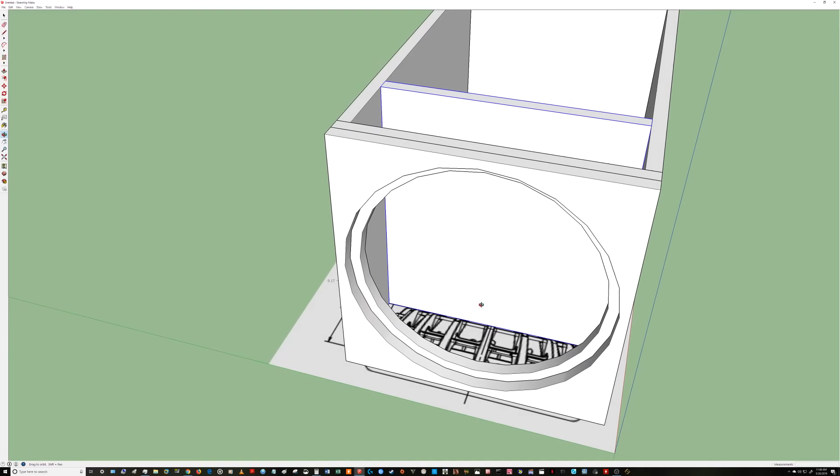And we know in order to get through that hole, this thing needs to have a 9-inch hole right here. So we're going to go through the same steps we went through before, and we're going to create a 9-inch hole, finding our center.

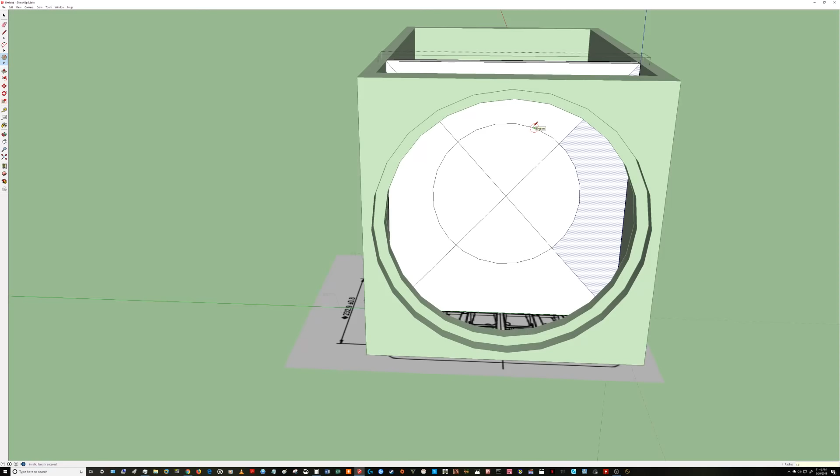This stuff is so easy, guys. Once you get the hang of it, it's very easy. And we know half of 9 is 4.5, right? Wow, that was a perfect 9 - it didn't even have to readjust itself. That's awesome.

All right, so what we're going to do is push this out, use the push tool, find that outer edge right there, and there it is. So what we're going to be doing from here is we actually have to manipulate this piece a little bit more, okay?

So I'm going to bring it out of here. I mean, I could leave it in here, but for display purposes, I'm going to bring this out.

Anytime you get the move tool and it doesn't want to go in the direction you want it to go - like right now I want it to go straight up in the air along the blue axis - some of you guys may not know the snap feature like I know it. I can find that snap and go straight up.

Some of you guys may not know how to do that. So whatever axis you want it to go, just use your arrow keys on your keyboard and point in that direction.

At this angle that I'm looking at this model, the blue is pointing straight up in the air, which is pretty much always. So you hit the up arrow.

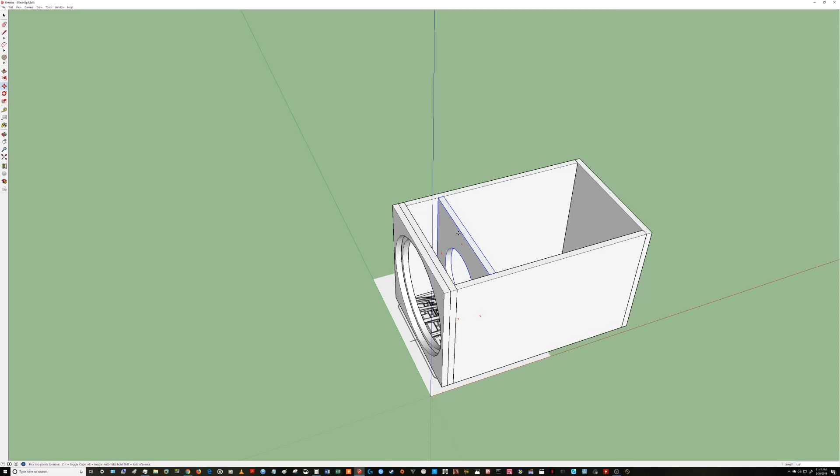Did you see that? Hit the up arrow, and what is it going to do? It's going to go - it doesn't matter where your mouse goes now, it can only go up and down. It's going to ride that blue rail, which is what we wanted to do.

The next thing I want to familiarize you guys with is the Q axis, right? This thing right here. I shouldn't say Q axis - that's kind of misleading, it's not a Q axis.

Actually, what it is - the shortcut to use this, if you guys want to find it over here, I think they call it a protractor. I think that's what that is. Where is it? I don't know where it is right now. Just know if you hit Q, boom, you get this thing here.

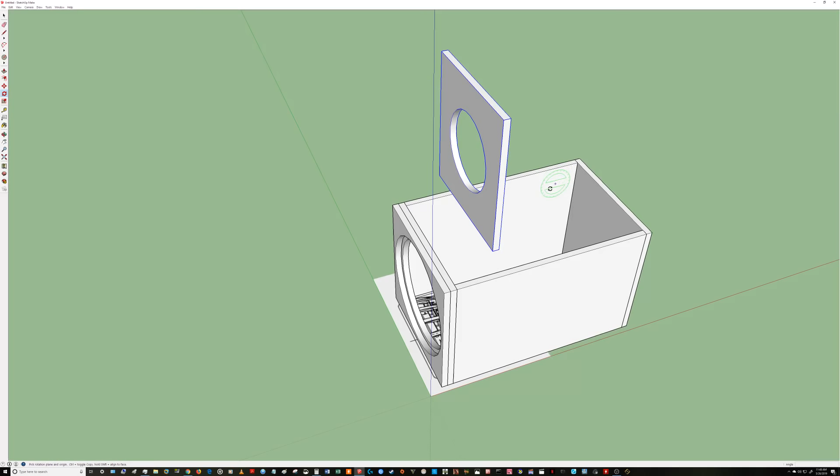Okay? Find the midpoint and you can flip it, and it'll snap as well along the red axis now. So why do we do this?

Okay, if you stick the driver directly in the center of this thing, that means it's going to have a hard time breathing on the inside. I mean, yeah, it's sealed - it's not actually breathing, right?

But you don't want to seal it off from the remainder of the enclosure. So what you want to do is create some gaps in the corners of this, or somewhere within here, to constitute airflow within the chamber.

So what I'm going to do is, again, ungroup this or enter the group, and I'm going to use my circle - no, not the circle, I'm sorry, use the arc. Shortcut A, and this is the tool up here. It has more than one arc - I'm going to use a 2-point arc.

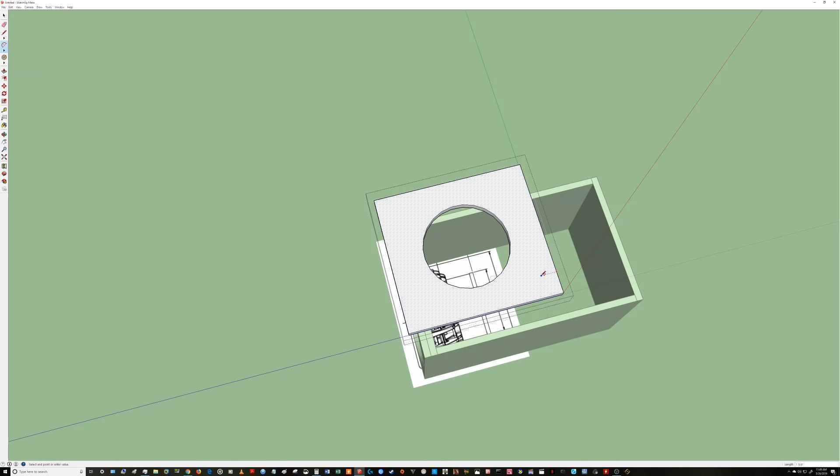My 2-point arc is going to come from here to here, and I'm just going to go about right there. Do the same thing over here, about from here to here.

Go about there, here to here, there. In the real world application, I'm going to tell you what I did, guys.

And you see when it turns purple or pink, it lets you know that you're in the same spot over here as you are over there. That's a perfect arc.

You see that? You see how that line goes in the middle? It kind of helps you out in that regard. But anyway, that's being measured as well down here, in case you guys are wondering.

Now, I didn't do all of them perfectly because I'm going to tell you what I did in a real world application. What I actually did was take a 6-inch diameter port, and I used 3 inches of it to create this. So let me back this up—there's no need for me to talk about it without actually doing it. Let's go from here to here, and get it to snap, and go out.

Well, I guess I'll be honest with you guys, this isn't perfect, but just know that if you get any circular object, you can do the same thing I'm doing now. I used a 6-inch port, cut it down to 3 inches, and used half of it to make my cutouts here.

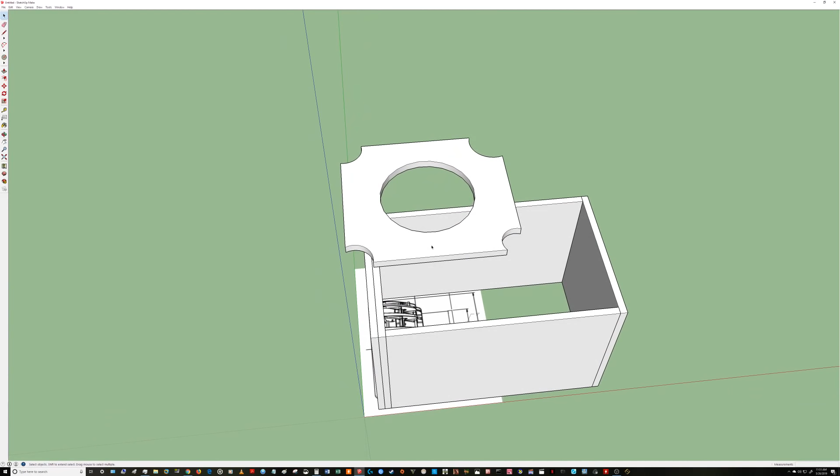All right, so yeah, you can make them bigger than that. I actually did make them bigger in my real world application, but for right now this is going to have to do. You guys get the gist of it. All right, boom, it's on the blue axis.

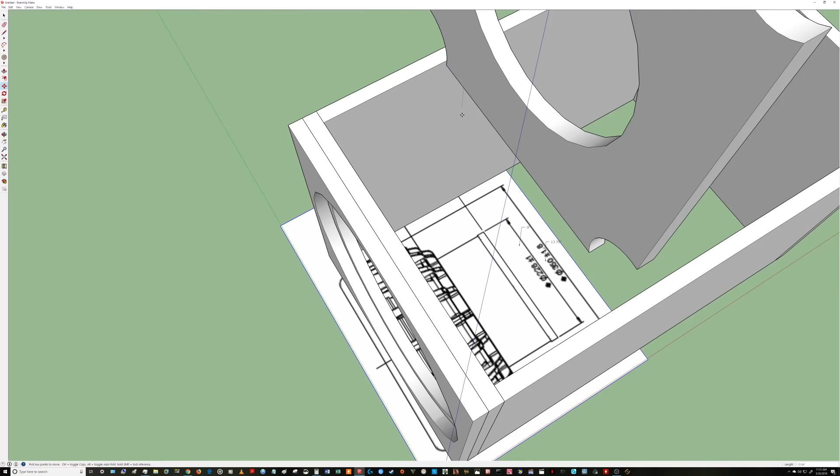All right, so now we can drop this puppet back in. We need the front of it, actually. We're going to use the move tool. Woo, not that—hit escape if you grab something you weren't intending to. And what we want to do is go straight down, so we'll hit the down arrow, and that'll guide it back to where you want it.

As you guys can see, it kind of lost its way a bit, so we're going to grab it and pull it forward, because that is exactly where it would mount in the real world application. It will mount right there, so your driver would go through here and into this.

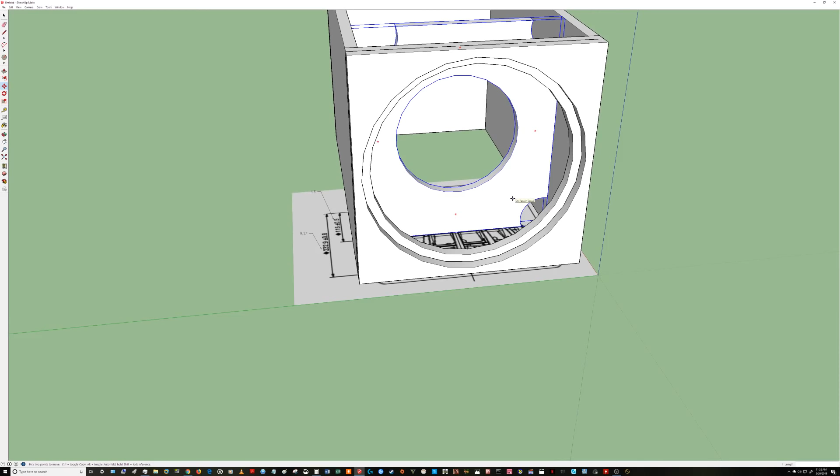All right, so boom. What I did was find the midway point of this enclosure—really the midway point between this point and that point. The center of it is going to need some bracing as well, so you can tape this from the red axis here to here, roughly 19 inches. So use a line tool. Half of 19 is about 9.5. So you do this, type in 9.5, and there you go.

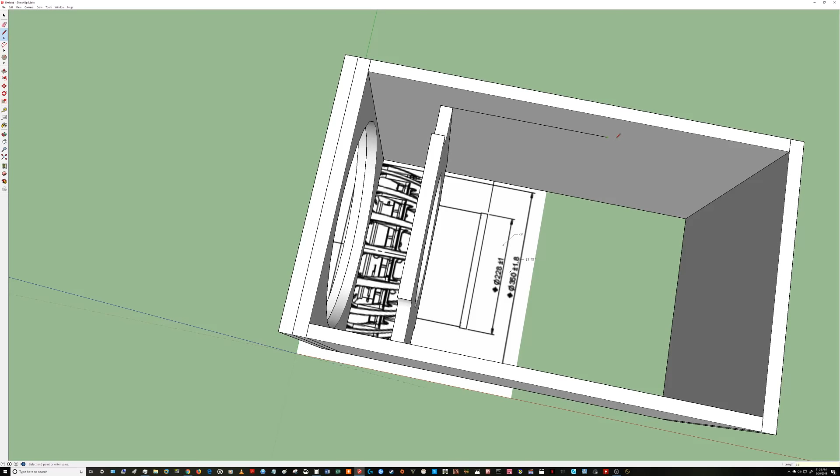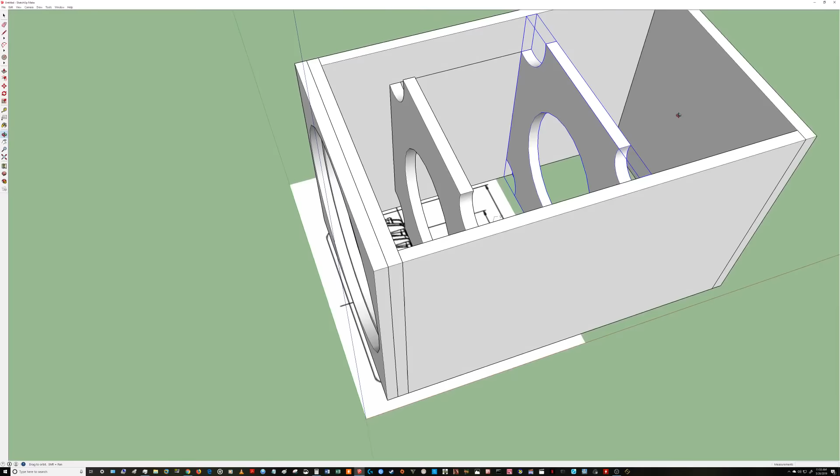You need to construct something right here, so you'd use another one—you can actually use this if you want. Make another one of these, since it worked just fine down here, why not make it down here as well? So let's move this down to here, like this, hit control, and there you go. Now it's double braced—plenty of bracing for this box, and that's how I created my box in SketchUp.

So you can go from here, and if you guys are wondering exactly how I constructed the pieces and how you get the individual cutouts, that's coming up in the next video. I'm going to show you how to construct your dimensions, do all your single pieces, and if you want to make this look pretty, how to give it textures and things of that nature, to make it look like real wood.

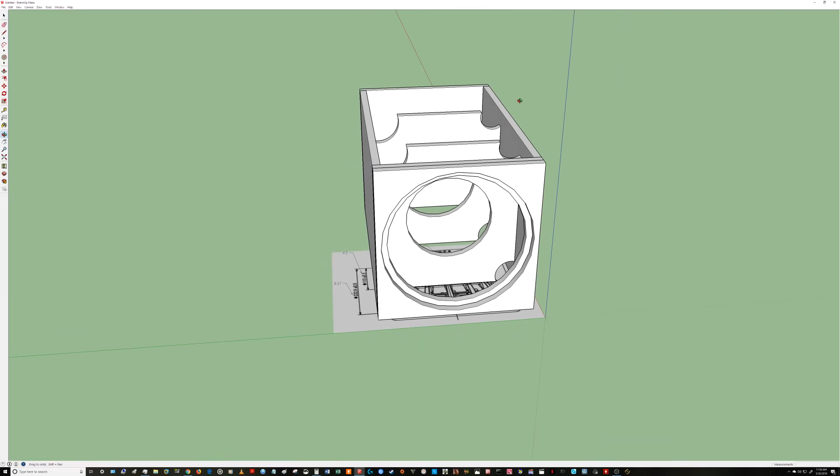But just know that as of right now, this enclosure, if you were to cut these pieces, would fit this driver perfectly. How do I know that? Because I've been doing it for years. All right, that's it for right now.